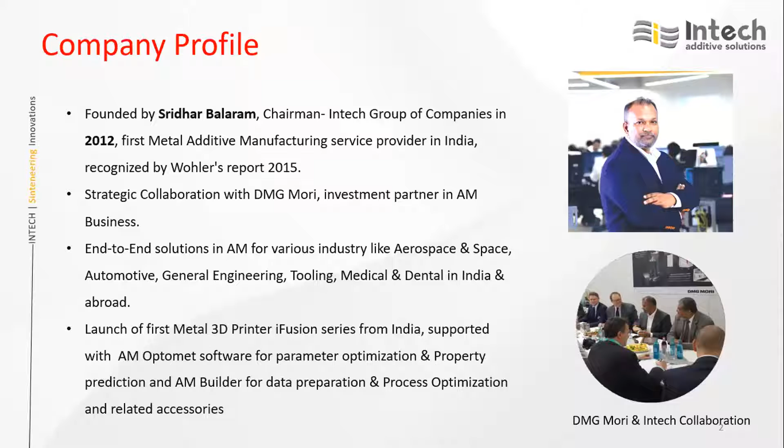We cater to various industries like aerospace, space, automotive, general engineering, tooling, medical and dental in India and abroad. We are the first metal 3D printer company launched in India, supported with AM Optomet software for parameter optimization and property prediction. We have also developed our in-house software called AM Builder, for data preparation and process optimization. All machine-related accessories are also developed by ourselves.

Coming to the Intech growth story, this company was founded in 2012 with 30 plus years of experience in foundry and machining. It started as the first AM service bureau in India. Later, we fully entered into providing services from 2014 to 2018, and we supplied many components to many government organizations as well.

In 2018, we launched our first product called AM Optomet, a parameter optimization software which helps in developing process parameters in a very quick time. Then in 2019, we launched the software called AM Builder, a data preparation software which helps in preparing data for 3D printing parts.

In 2020, we launched a machine called iFusion SF1. This is India's first laser powder bed fusion machine, launched and commercialized in India. Then in 2021, we successfully installed seven machines - 5 in India and 2 abroad, 1 in Germany and one in Greece.

Coming to the Intech product portfolio, we manufacture iFusion series machines. It is of 3 categories: small format machine, mid format, and large format.

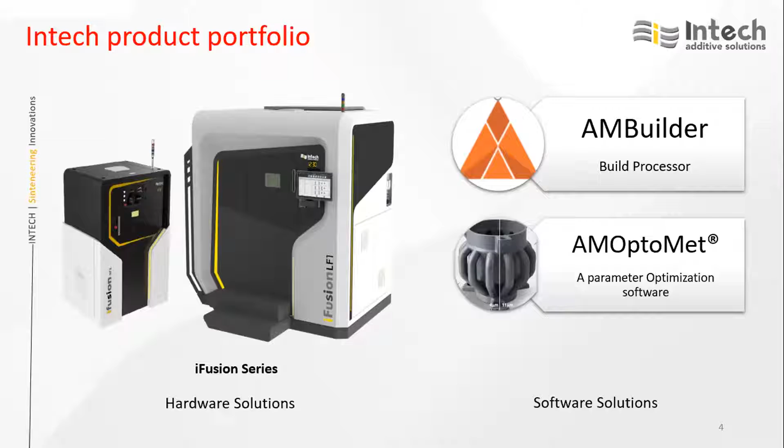Small format machines have a build volume of 150 mm diameter and 180 mm height. Mid format has the range of 325 mm cube, and large format has a build volume of 450 mm cube. These machines are supported by softwares called AM Builder and AM Optomet - AM Builder for data preparation and AM Optomet for parameter optimization, that is process optimization.

End-to-end solutions is something Intech provides to its customers and to people who want to start their business in additive manufacturing. The process starts with design and DFAM.

We have a strong design team internally which helps in converting conventional models to 3D printable models. In this process, first we take the CAD model from the conventional process, and we apply design guidelines - that is DFAM, design for additive manufacturing. By applying those guidelines to the conventional parts, we convert the part into a 3D printable part with improved performance.

In this process, we do topology optimization, generative design, part consolidation, and lattice structures to reduce the weight of the component and to save material.

Once the design part is finished, then the selection of material happens. In this process, as of now, there are very few materials available for metal additive manufacturing, so the selection of material is a very important criteria.

First, we analyze the material being used conventionally. Then, by taking the property values, we match the nearest material available for 3D printing. We also try to replicate the same material with the same properties, such as producing powder of the same chemical composition.

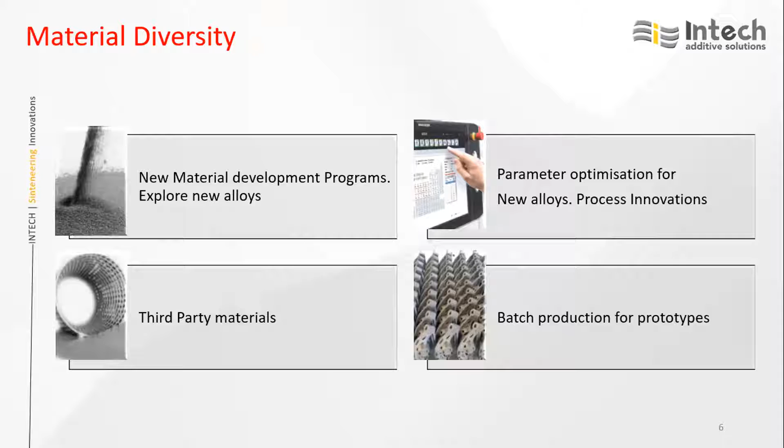Finally, batch production is something we are looking at, like printing multiple components in a single build to reduce the cost.

Coming to the technical discussion for today, I'm going to speak on introduction to additive manufacturing. I will not spend much time on this introduction, and quickly jump into the factors influencing the process and the procedure for developing the process parameters.

Introduction to additive manufacturing, then types of additive manufacturing. Specifically, I will speak on the laser powder bed fusion process, also called selective laser melting. Then AM process workflow, AM design rules and guidelines, factors influencing the AM process, strategies in laser powder bed fusion process, and material parameter development and qualification.

What is additive manufacturing? You may already know, but I'll explain in a few seconds. The official definition of additive manufacturing by ASTM is a process of joining materials to make objects from 3D model data, usually layer upon layer, as opposed to subtractive manufacturing methodologies.

What this means is, in a conventional manufacturing method, if you want to produce a component, we have to take a billet and apply turning, milling, drilling, and all these operations to get the final component. This is called subtractive manufacturing - we subtract material from the billet to get the final component. In this way, there is a lot of wastage of material.

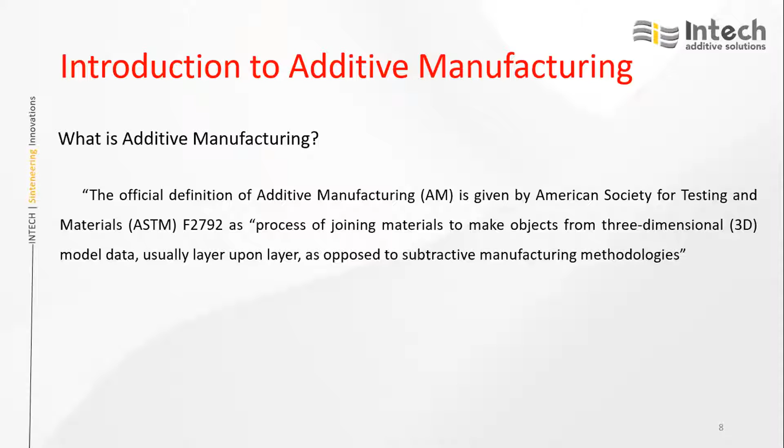Typically, AM processes are classified into 7 categories: material extrusion, vat polymerization, binder jetting, material jetting, sheet lamination, direct energy deposition, and powder bed fusion.

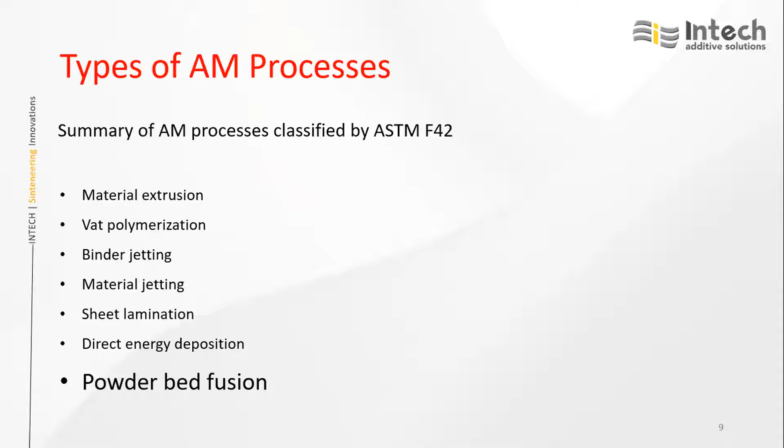Under powder bed fusion, there are again 2 processes: laser based and electron based. We are into laser based additive manufacturing. The principle of working of the laser powder bed fusion process is...

...the melting of the powder happens with the help of a laser beam. During the laser sintering process, a layer of metal powder is solidified by heating it to a temperature above the melting point through exposure to the laser beam, and subsequent solidification happens in an inert atmosphere. The atmosphere is very important in order to prevent the powder from oxidation.

Once one layer is completed, the build platform moves down by a thickness equivalent to the layer thickness, and with the help of a recoater, the powder for the next layer is spread onto the build platform. As per the CAD model, and with the help of a scanner and laser, selective sintering and solidification happens, and this process repeats layer on layer till the final layer is done and we get the solidified part out.

This is the typical schematic of the laser powder fusion process. Here you can see the left side is for powder supply - it's a two-way powder supply, from left to right and right to left. Between it is a build platform where you can see the printing of the component happening with the help of a laser, focusing lens, and moving mirrors called scanner mirrors.

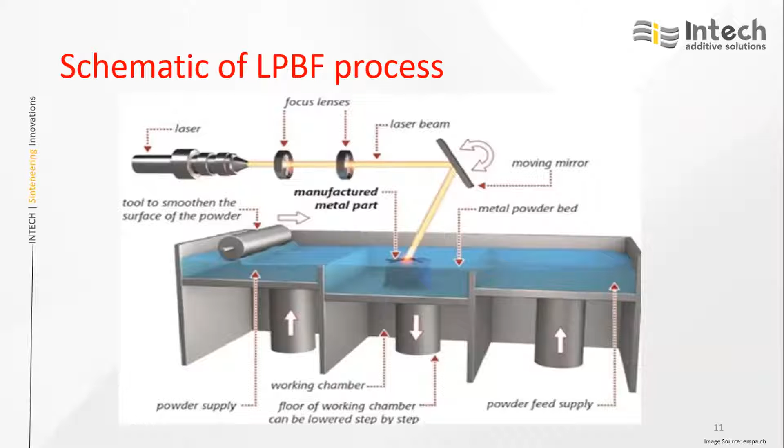To print the actual component, we need a supporting plate at the bottom, called the base plate. The actual part printing happens on top of it. The size of the base plate varies from machine to machine.

Then printing happens. Once printing is done, we need to separate the printed components from the base plate, called wire cutting. We cut with the help of wire EDM to separate the components from the base plate. The base plate's leftover regions will be machined and the base plate will be reused.

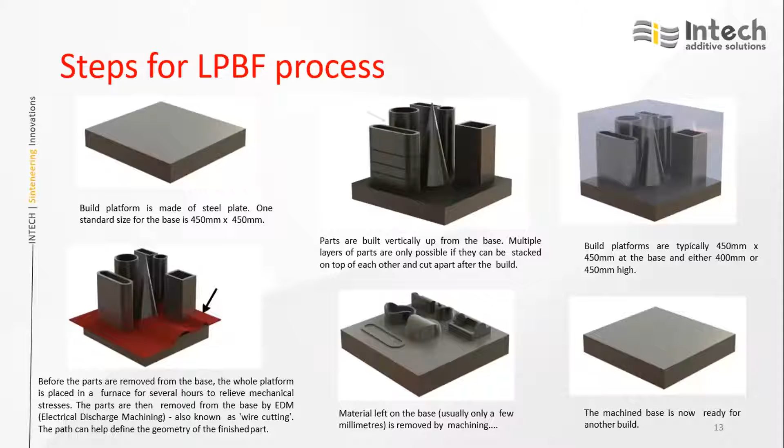Since we are cutting it, we can't directly cut the actual component, so some clearance needs to be provided from the base plate to the start of the actual component. That is called wire cutting clearance, normally 1 to 2 mm for any component that needs to be printed.

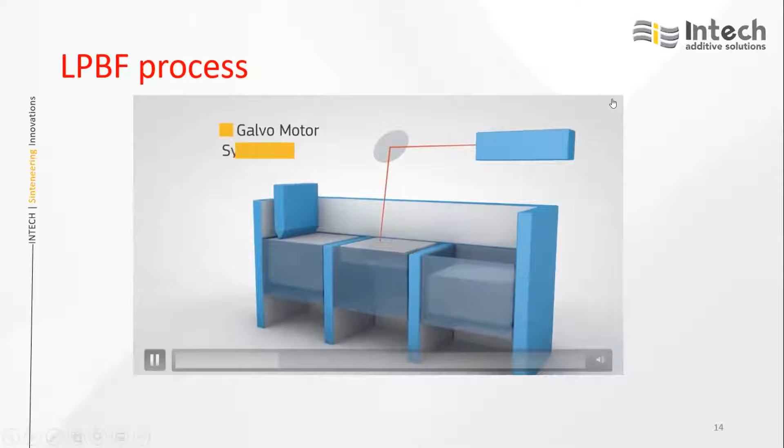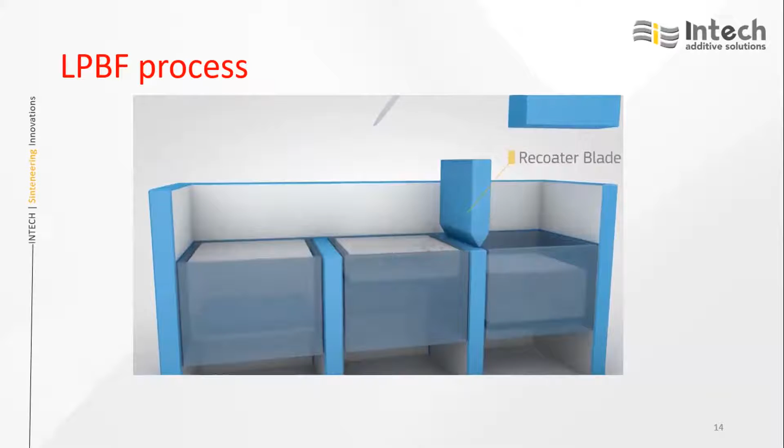I'll play a video on how the laser powder bed fusion process looks. This is how the process prints.

Coming to the process flow, it has 3 phases: design, manufacturing, testing and qualification. In the design stage, first the specifications required for designing a component are taken, and with the help of CAD software, it is designed as per the specifications.

The input for data preparation in additive manufacturing is the STL file format. The CAD model is converted into STL format, and the STL file is inputted to the data preparation software, which we are using, AM Builder. We import the part and do all the orientation and support optimization in this builder software.

Once that is done, slicing happens, since it's a layer-on-layer process. We need to slice the component into a number of layers, and this data is called an INSL file, which is transferred to the machine. As per the data provided in the INSL, the building of the parts happens.

Once printing is done, it is removed from the machine, called part removal. Once the part is removed, we need to perform post processing. Once post processing is done, the final step is part inspection. If the specifications are within limit, the part will be accepted. If it is out of the specification limit, we reject it and go back to the machine setup to check the problem, whether it's due to process parameters or other process-related issues, and we need to address that.

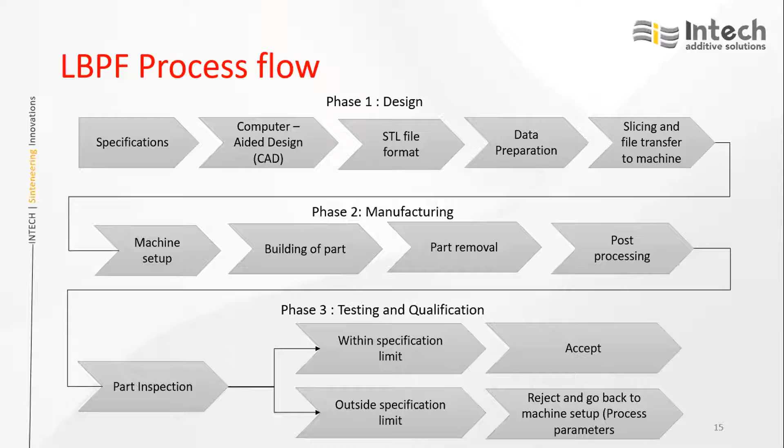Coming to the data preparation workflow: first we create the build of certain dimensions of the machine, then import the parts. If there are any errors in the STL, we need to fix them.

There are certain limitations in additive manufacturing called thickness, specifically minimum thickness, which is only possible in the process. For that, we need to check wall thickness analysis.

Once all things are satisfied, we need to position the component on the build platform, called orientation. Which orientation will give less support? Since supports in this process are costly, we need to orient in such a way that the support structures are less and the build time is less, in order to improve productivity.

Once that is done, we need to do distortion analysis for the support given, to check whether the part is printable or not. If less support is given, there's a chance distortion will happen, because this is a process where melting occurs, so thermal stresses will be induced in the component, causing a chance of distortion. So this distortion analysis needs to be performed.

Once that is done, we need to slice the component and export the data to the machine.

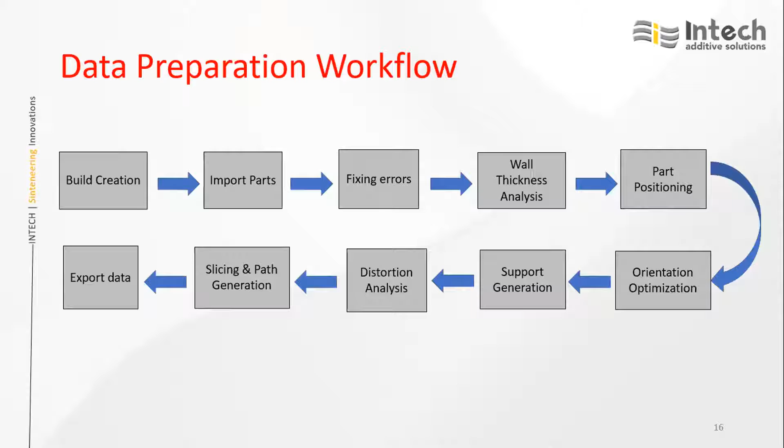I will play one more video on the process of laser powder bed fusion.

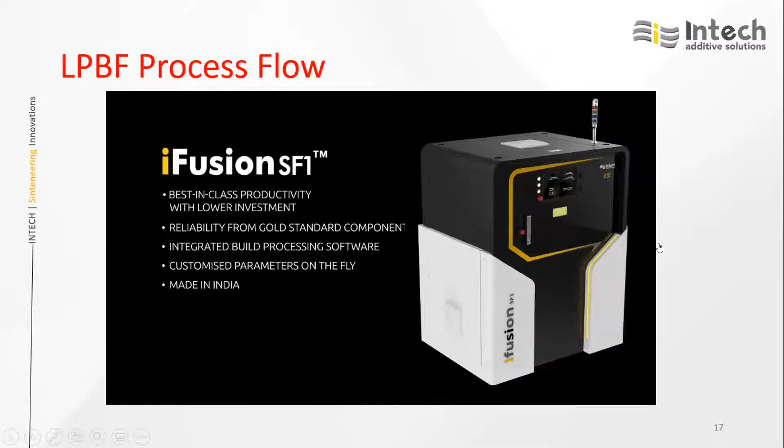This is our Intech SF1 machine, iFusion SF1. It has a dimension of 150 mm diameter and 180 mm height.

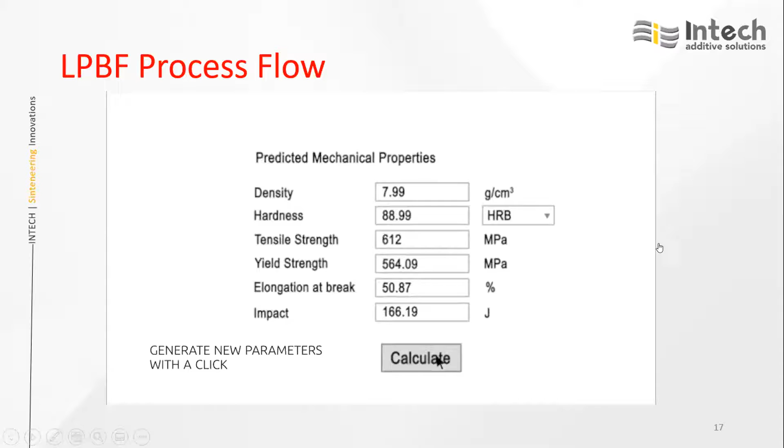This is AMOptoMet software for parameter optimization. Initially, we can select the chemistry of the material and give the percentages to it. If you click on the calculate button and adjust it, we will get the process parameters directly. We don't need to go through DOE, design of experiments. We can directly get the process parameters.

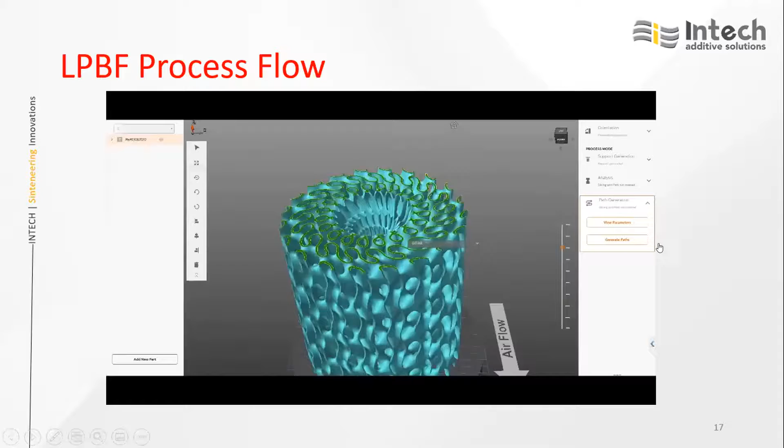With the help of AM Builder software, we can create the build size as per the machine and import the component and apply the hatching parameters. This is the path generation. You can see the vectors for the laser movement. Once that is done, the file is exported into the machine.

With the help of the recoater, we are spreading the powder, and as per the sliced layer, we will be printing, and this process repeats till the final component is done.

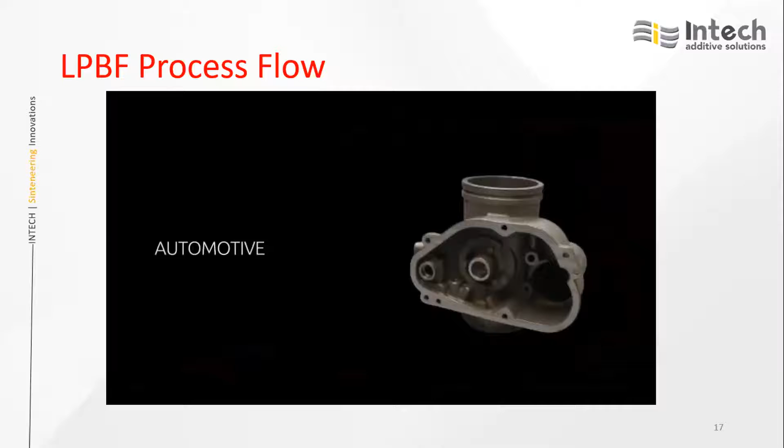Why laser powder bed fusion process? I'll give a small comparison among different processes to produce a net shape machine part, assuming it is having a weight of 61 grams.

These are a few components which we have printed using laser powder bed fusion process. One is the flame tube. It has a dimension of 600 mm and 300 mm height. It is sectioned into five segments and printed, and finally laser welded.

And the second thing is IN718 turbine blades, which has a diameter of 100 mm and 60 mm height, and finally heat treated as per AMS 5662 to get the required part properties.

And this is the impeller, on the right hand side, which is made of 17-4 PH material. It has a diameter of 280 mm and 50 mm height. Machined and heat treated as per H900 cycle. In 3D printing, we will not get the machined surface which is seen in the image, so it has to be machined or post-processed based on the surface roughness required.

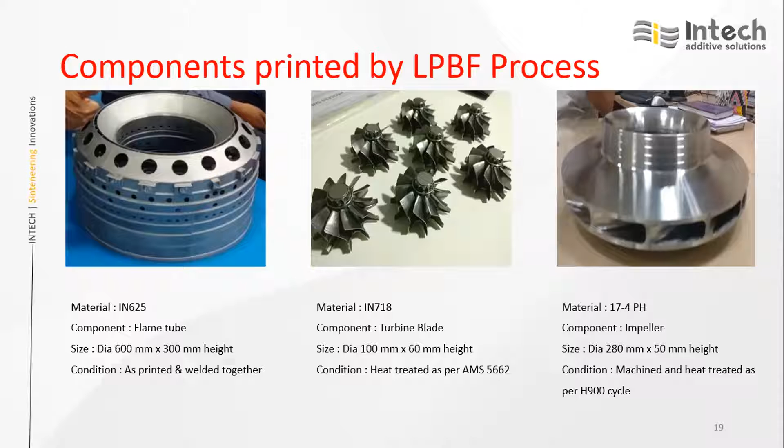Now I'll speak on factors influencing the laser powder bed fusion process. Majorly, the process is influenced by these categories: material, equipment, and production process, post-processing, inspection of the component, and material qualification.

When it comes to material, in this process, the input material is powder. So at the powder stage, all these major elements like chemical composition, tap density, morphology, flowability, particle size distribution, and the number of times the powder has been used.

All these details you need to take, analyze, and once it is okay, then we need to go to the equipment level. There we need to check the calibration of the equipment, standard operating procedures of the machine, and preventive maintenance checklist. All this we need to check.

Once the equipment level is passed, then we need to go for production. If DFAM needs to be performed on the component, it needs to be performed. Inert gas flow - in this process having inert atmosphere is very important. That condition we need to check.

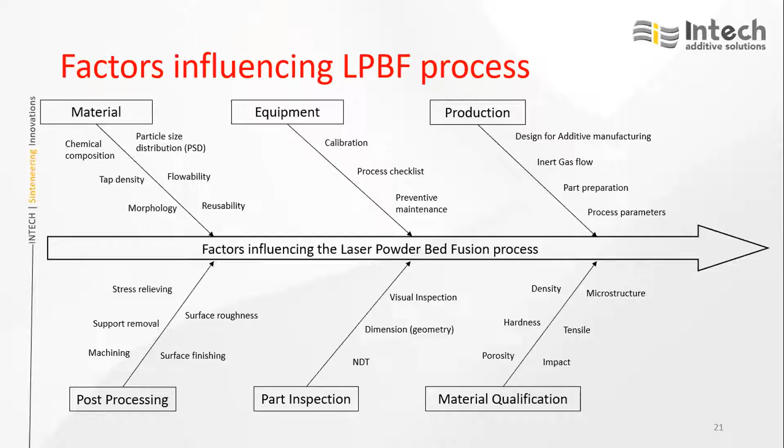The reasons behind the delamination and the major problems which we get in the process are delamination of the layers, shrinkage, cracks in the part, distortion, and warpage during post processing. The reason behind this is maybe the process parameters, maybe a bad machine preparation, and maybe the selection of base plate is not suitable for the given material.

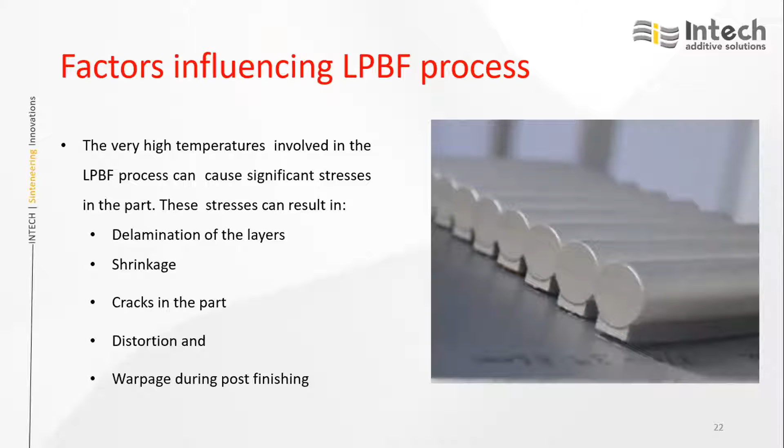There are many factors involved why the part fails. How to avoid that? These problems can be minimized or avoided by roughening the parts to relieve stresses.

If a base plate surface is too smooth, then the weldability will be weak. So having a little rough surface on the base plate will always help for proper bonding of the first layer with the base plate. If the first layer with the base plate is proper, then there will be proper heat transfer and dissipation from the printed layer to the base plate. So a kind of shot peening or roughing is required.

Then heat treatment is done to relieve the stresses before we actually break the supports. Supports are supporting structures. If that is done without relieving the stresses, once the supports are removed, there will be a chance of distortion in the component. This needs to be minimized or eliminated. To eliminate that, we need to relieve the stresses.

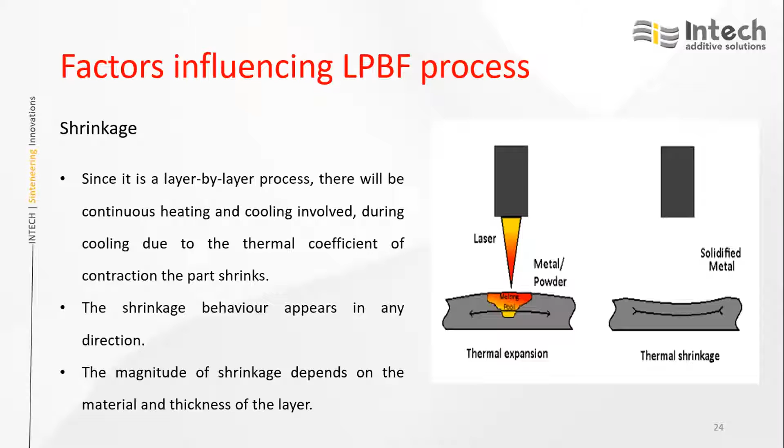So these shrinkage allowances we need to compensate in order to get dimensional accuracy. To get that, we need to perform fine tuning, like how much shrinkage will be there for each material in x direction, y direction, and laser beam offsetting. All this we need to perform. We will have a standard component for that, print on it, get the differences, and by having the differences, we will apply the correcting factors.

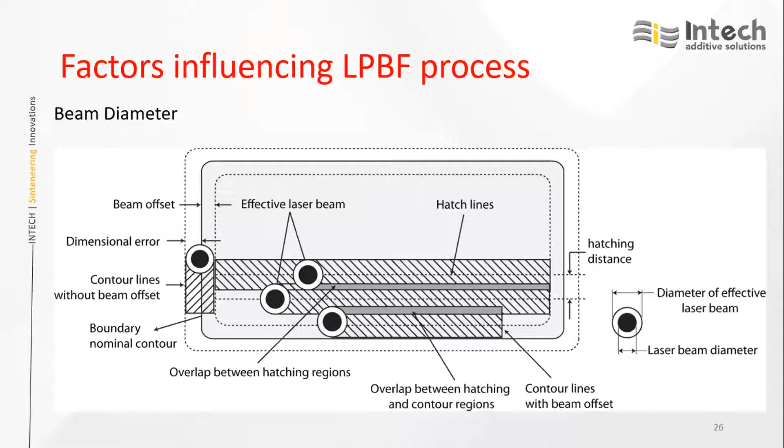In order to reduce this, we need to shift the laser inside the actual component by a distance equivalent to half the diameter of the effective laser beam. That is our experiment. With this experiment, we will get that beam offset value as well.

And support structures: if support structures are too strong, there is a difficulty in removing the supports. Supports need to be removed easily, and should not be too weak such that during printing only we get a problem with delamination. So a sufficient amount of supports and parameters needs to be selected such that it has sufficient strength to also support the actual component. This will help in reducing the thermal distortion that leads to cracking, curling, delamination, and shrinkage.

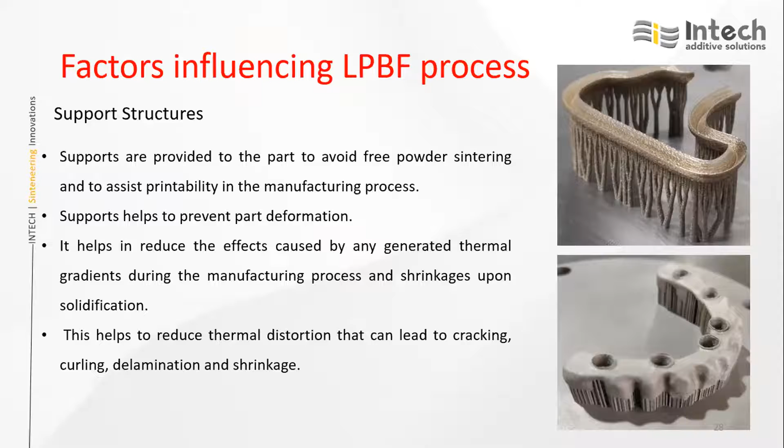One more important factor influencing the process is inert gas flow. Because in this process we are melting the component, and the heat reaches boiling point, and then vapors will generate in the process. During the laser beam interaction with the powder, there is a chance that a few particles from the molten pool will get spattered from the pool.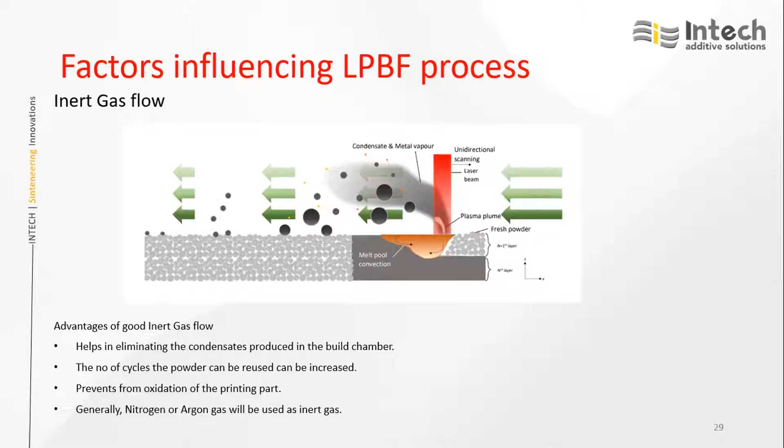All this in the form of condensate, if it falls back on the powder, which you can see as black particles falling back onto the powder bed - if this is not removed properly, the powder will get contaminated, and the life period of the powder will get reduced. If it is properly removed with the help of inert gas, then the quality of the powder will be maintained for a long time, and it can be used for many builds. Typically, nitrogen or argon gas will be used as inert gas.

Conditions at which the operation is happening are also very important, because the laser and scanner mirrors will always be maintained at a certain temperature. Small deviation will affect the part geometries and cause problems. So the typical temperature which needs to be maintained is 18 to 22 degrees and relative humidity of 40 to 60%.

The most important thing is powder quality. If the input material has problems, obviously the final component will have problems. So powder quality needs to be evaluated thoroughly. We need to check morphology, composition, and physical behavior. Under morphology: size and shape. Size is the particle size distribution, and shape is whether it is spherical, satellite-like, or irregular. All these we need to evaluate.

Coming to composition, chemical composition, like each element is within the normal composition or not. Then microstructurally, phase and porosity. If porosity is there in the input powder itself, then there is a high chance of getting porosity in the final component. Then physical behavior, flowability.

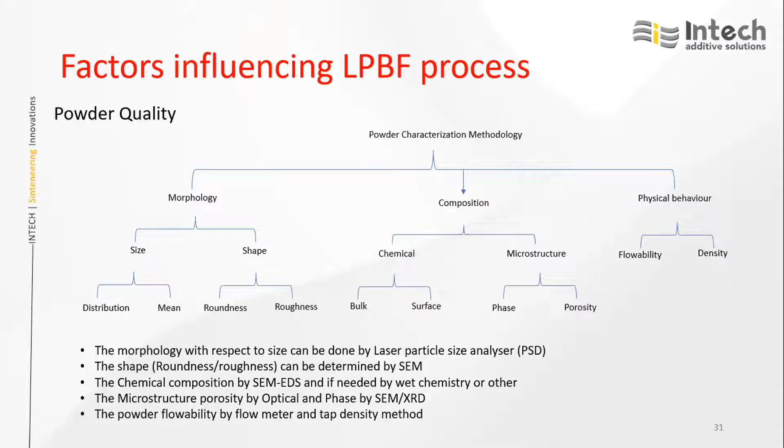The powder needs to be stored in good, tight, air-free containers, because if it is open to the atmosphere, there is a chance the powder catches the moisture present in the air. So it needs to be packed properly and kept in a shelf so that the life of the powder usage can be increased.

Before I start the procedure and explain why process parameters are important, I will show the defects and the reasons behind the defects in the laser powder bed fusion process. But before that, I would like to take 2 to 3 minutes for questions and answers.

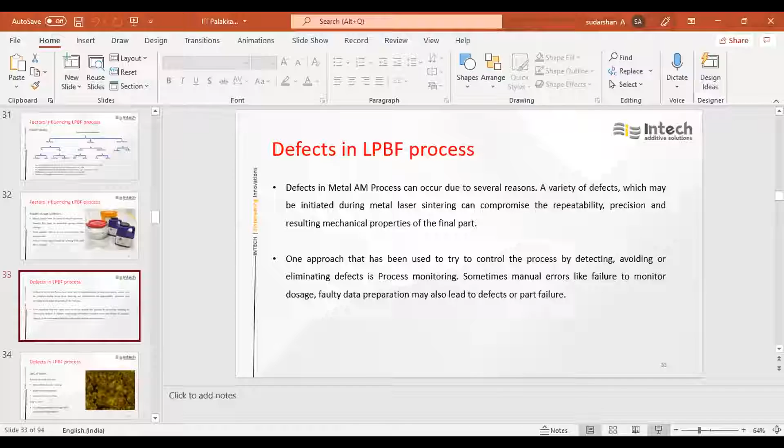Sir, you talked about some support structures. Yes, support structures. So after doing the process, what is the solution to remove these support structures? What solution is utilized?

This is metal based, so here we will not use any solution. It is done manually, we need to use tools, pliers, and so on to remove it. If the support structure is too strong, then we need to do machining. Those things I will cover in the post-process section, it is yet to come. I will show how it is manually removed and how the machining happens. Okay, thank you sir.

Any other questions from the audience? Sir, what is the minimum dimension that we can print with the equipment?

We also need to consider the aspect ratio. Considering all that, a minimum wall thickness of 0.3 mm is possible, sir. 0.2 mm is also possible, but not for bigger heights like 30, 40, 50 mm. If the height is up to 10 mm only, 0.2 mm is also possible. But it is recommended to have 0.4 mm wall thickness all the time. Minimum 0.4 mm, less than that is also possible but depends on the aspect ratio, like how much height we need to print with that particular thickness. With 0.4 mm, it is possible to print whatever is required. So 400 microns is the minimum.

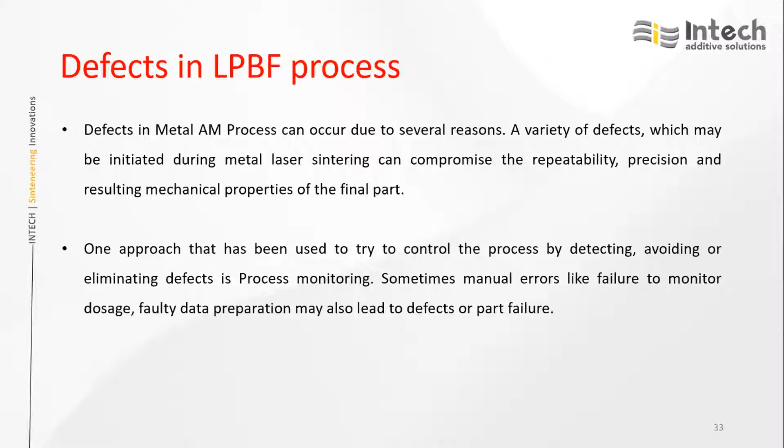The reasons for lack of fusion may be non-uniform powder coating, bad process parameters, or improper inert gas flow. How to solve this? We need to optimize the process parameters very well, in such a way that sufficient energy is provided to melt and solidify the powder.

The second thing is porosity. Porosity's reasons behind it are also bad process parameters and improper inert gas flow. Bad process parameters is a direct thing. Improper inert gas flow, as I mentioned, the condensate which is generating, if it falls back onto the powder bed, it will disturb the laser beam.

When the laser beam interacts with the powder, if this condensate is there, the penetration of the laser beam to the required depth will not happen. Because of this, porosity may come. So again, by optimizing the process parameters and controlling the inert gas flow, the porosity can be controlled.

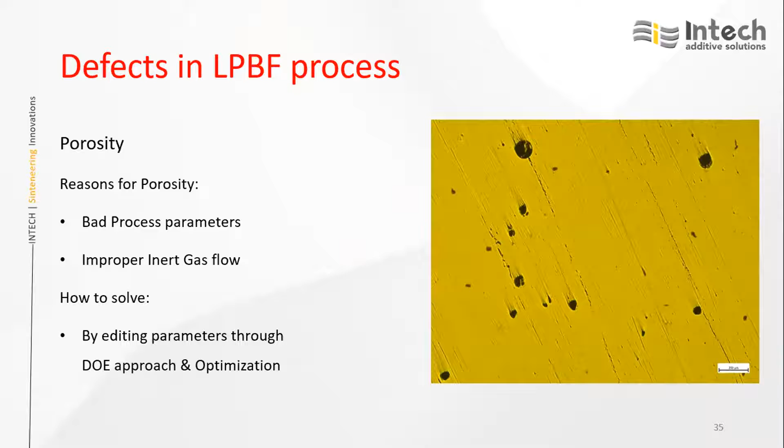And ball formation, this will happen when high energy density, high energy of the laser is used. This again can be solved by optimizing the process parameters.

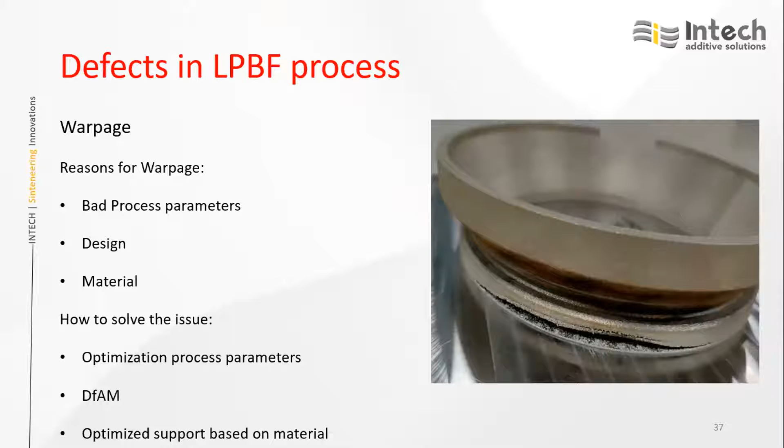And warpage, this is the lift off on the base plate. This also happens because of bad process parameters, design, and the material. How to solve the issue? Again we have to optimize the process parameters. We have to do DFAM, design for additive manufacturing, optimize it, and select supports based on material.

This is support failure. The support got delaminated from the surface. This is because of bad support parameters and support selection. So we need to optimize the support parameters as well while optimizing the other parameters, with right selection of supports for the given location, based on the location and the amount of component area that needs to be printed on the support.

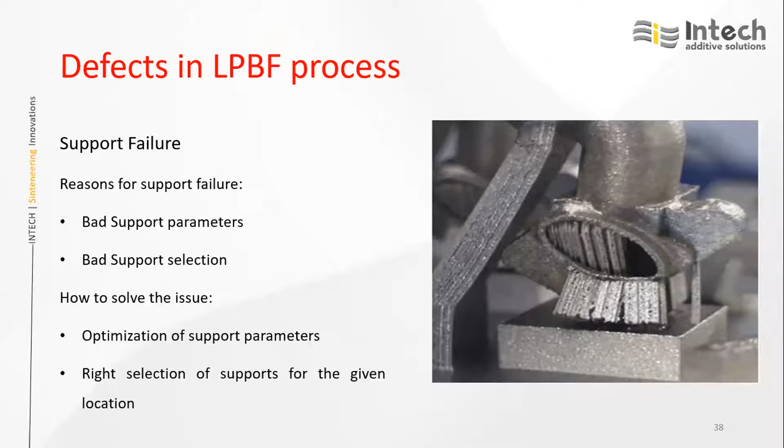I will show the different categories of process parameters that are important for building the component in the later slides.

How to solve the issue is providing the supports wherever required and the parameter optimization.

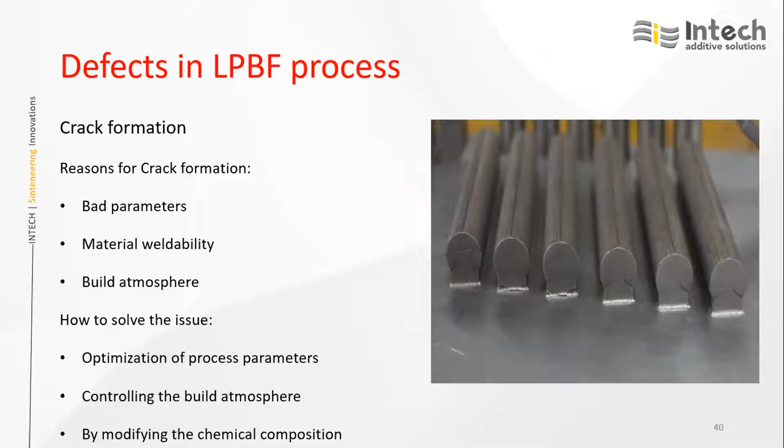How to solve the issue is we need to optimize the process parameters, controlling the build atmosphere. And if the material itself is prone to cracking, then we may need to modify the chemical composition without affecting the final properties.

What are the important process parameters that need to be optimized? One is laser power, scan speed, hatch spacing, and layer thickness. Laser power is the amount of heat generated by the laser in joules per second. Scan speed is the speed at which we are making the laser beam move on the powder bed. Hatch spacing is the distance between two consecutive laser beam paths in a given layer to cover the entire area.

The laser has to go in vector forms. In the video, we have seen vectors are there. For each vector, the distance between two vectors is nothing but hatch spacing. Layer thickness is the thickness of each layer.

Here I will be showing what is hatch spacing. Hatch lines you can see, and hatch distance is between two scan paths - that is called hatch distance. Laser and the spot with what speed it is going is the scan speed, and the power is the amount of heat we are inputting. Layer thickness is also the thickness of the layer.

Here you can see contour lines without beam offset on the left side. If the diameter is exactly sitting on the border of the component, half of the portion comes outside it. That is called dimensional error. As I mentioned, we need to put that diameter inside so that we compensate the dimensional error.

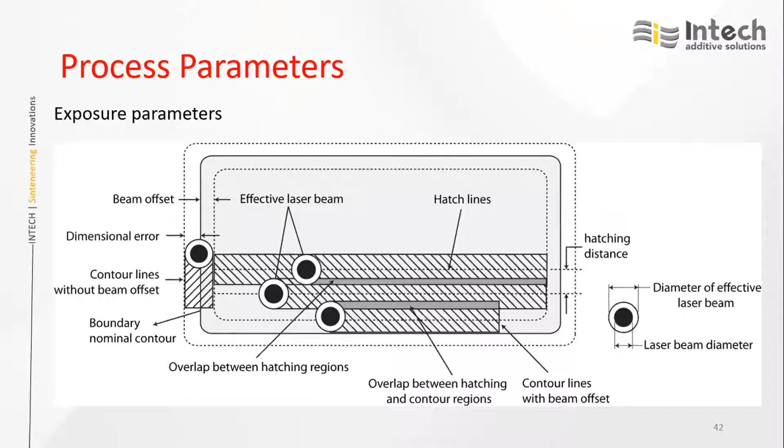How to decide these four process parameters? This is depending on energy density. Energy density is in terms of joule per mm cube. It is the amount of energy required to melt a material of 1 mm cube - like to melt a 1 mm cube block, how much energy we need to supply. That calculation, I will give some guidelines how to arrive at the energy density.

Once we arrive at the energy density, we have to split that energy density into process parameters. What is that process parameters - laser power, scan speed, hatch spacing, and layer thickness. Energy density is nothing but laser power divided by scan speed into hatch spacing into layer thickness.

How to arrive at the energy density? For a given material, the amount of energy required for melting 1 mm cube area is to be calculated. This energy density varies from material to material because the material properties are completely different. If it is aluminum, the melting point is very less. If it is steel, it is more. If it is refractory metals, it is still more. So obviously the amount of energy required to melt 1 mm³ area is different.

So first, for a given material, we need to collect all the material properties like density of the material, thermal conductivity, latent heat, melting point. All those we need to collect, and using some formulas, we need to calculate what is the amount of energy required to melt that.

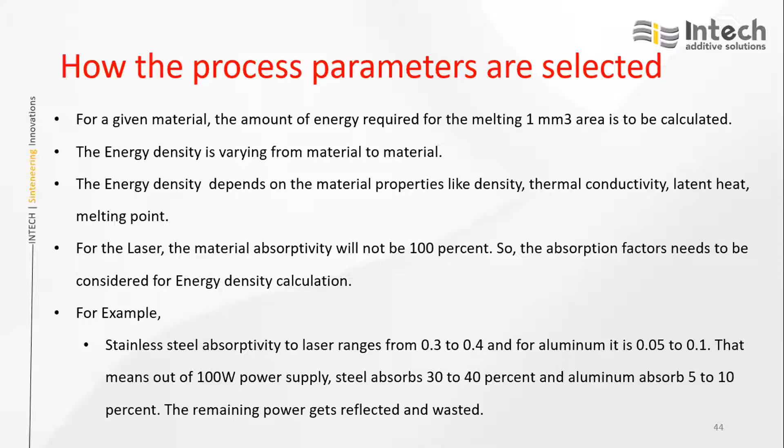For a given component, there will be exposure areas like core of the component, upskin, downskin, contour, and support. The key process parameters are only 4: power, speed, hatch spacing, and layer thickness.

When a given component is given, it has 5 zones: core of the component, which is inside the component; upskin, which you can see when it is split into layers; the bottom layer is downskin, since nothing is there underneath; on top of that core is printed, and on the right side upskin is there.

It is a comparison between two layers, core and core, bottom core and top core. Whatever area is not replicating in the present layer compared to the previous one is called upskin. And if you see the third core area on the left hand side, it is an overhang compared to the previous layer. No material is there in the layer below, that is called downskin.

So downskin parameters are different, upskin parameters are different, core parameters are different, and support parameters are different. And to get the roughness right, border printing is there, called contour printing, and those parameters are different too.

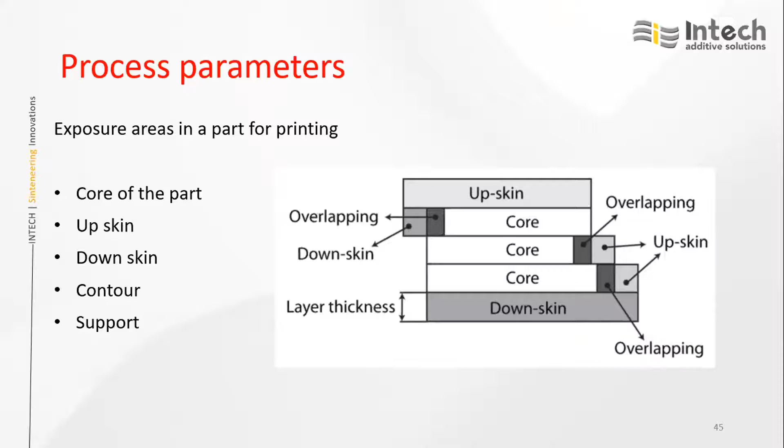And if you go specifically, core again has parameters like scan, stripe width, stripe overlap, minimum vector length, merge vector length. These are all required to get a dimensionally good and defect free part.

But basically these 4 parameters are very important. All others are also important, but if these 4 parameters are optimized properly, we'll get good density. All other things are easy to optimize.

In a similar way, downskin has many process parameters, upskin has many. Contour and support will have all these parameters too. When you want to produce a component that is good and defect free, this number of process parameters needs to be optimized. It's almost 100 to 150 process parameters we need to optimize.

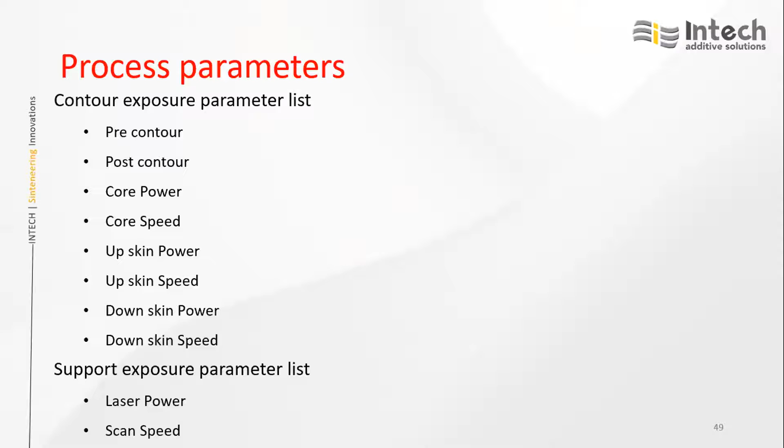Out of all these, the 4 parameters - power, speed, hatch spacing, and layer thickness - are very important. It's about how we need to arrive at energy density and how the process parameters need to be optimized.

Then comes post processing. Why is post processing required? This is to remove the printed component from the base plate, remove the powder from the printed component, improve the surface roughness, improve the mechanical properties, reduce the residual stresses, and achieve the dimensional accuracy.

Here you can see how the printed component is removed. Once the component is printed on the base plate, it needs to be removed from the machine, and the methods of removing it are manual or automatic.

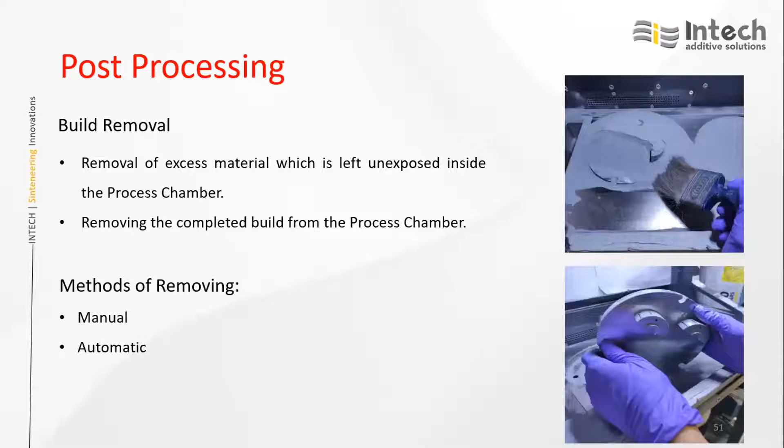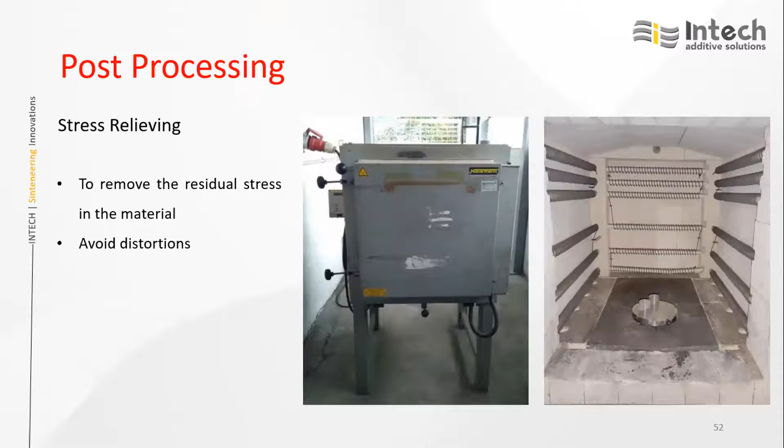Then we need to do stress relieving. Once the part is printed, in order to relieve the stresses, we need to put it into the furnace, and based on the material, we select the heat treatment cycle to relieve the stresses.

And once that is done, we need to remove that component from the base plate with the help of wire cutting. Support removal - one of you has asked how supports are removed.

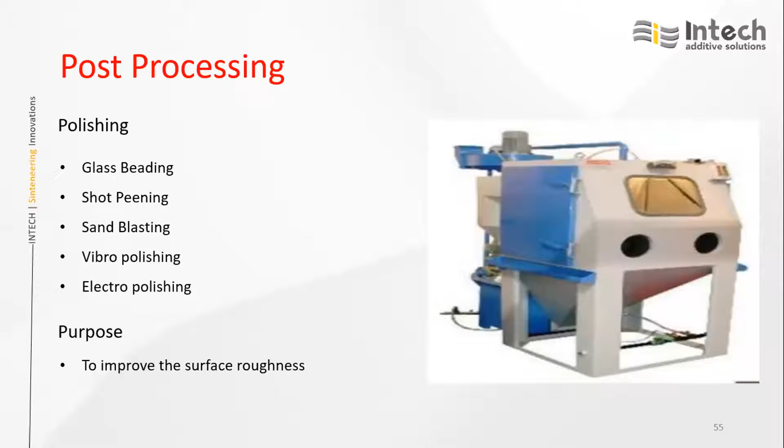And to get a good surface finish, we can go for glass bead blasting, shot peening, sandblasting, vibro polishing, and electro polishing. These are all operations based on the surface roughness requirement. We can go through any of these polishing techniques.

This is the final heat treatment. Earlier was the stress relieving. This is the final heat treatment to get the required mechanical properties.

For this, solutionizing and age hardening is something which we normally follow. During the solutionizing stage, we can get a homogeneous microstructure. Then by doing age hardening, also called precipitation hardening, we can improve the mechanical properties.

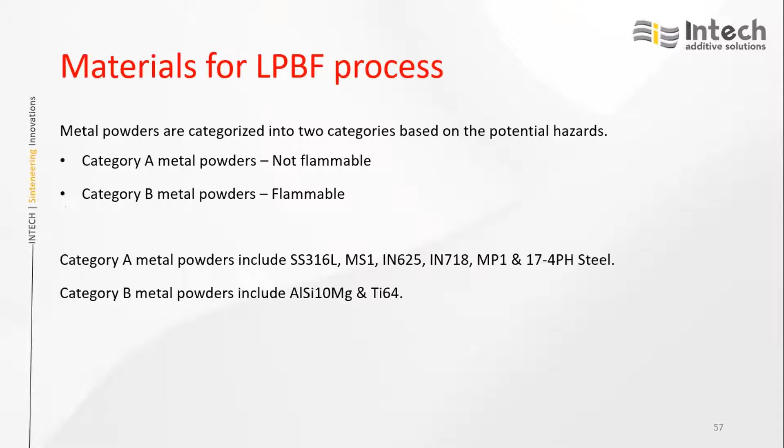Materials for the laser powder bed fusion process are categorized into 2 things: non-flammable and flammable. Category A metal powders include SS, maraging steel, 625, 718, cobalt chrome, and 17-4 PH. Category B metal powders are AlSi10Mg and Ti6Al4V.

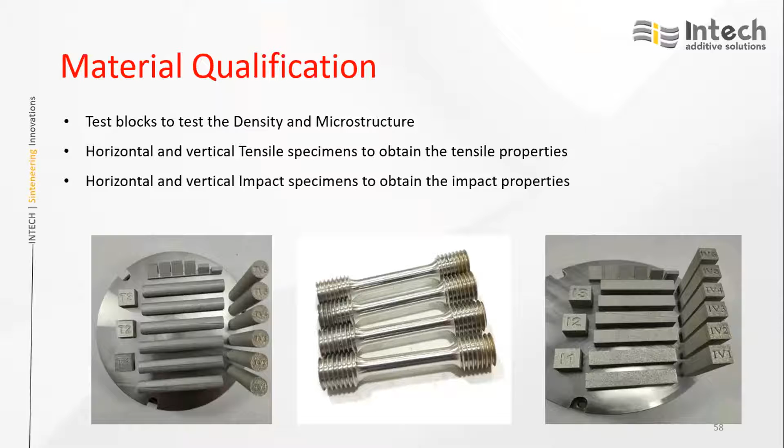These impact and tensile bars are in terms of cylinders or cuboid structures. This needs to be machined as per standards like ASTM E8 for tensile and E23 for impact. To these dimensions we need to machine, test, and qualify it.

Basically, material qualification has to go through these 5 stages: one is at the powder stage as the initial thing, then part printing, post processing, material characterization, and mechanical testing.

For powder, I have explained what and all we need to check: PSD, morphology, chemistry. For printing, data preparation, slicing, and process parameters.

Post processing includes stress relieving like supports removal, final heat treatment, solutionizing, age hardening, hipping, grinding, vibro polishing, all those. Material characterization includes density, hardness, sample preparation for porosity and microstructural characterization.

Then finally mechanical testing. From powder to end part for application, all those testings we need to perform.

This is a simple case study to better understand why additive manufacturing. Historically in aerospace, buy to fly ratios can range from 15 to 30 to 1 on the high end, depending on the shape of the part and the manufacturing process. With the implementation of additive manufacturing, the wastage can be significantly reduced while also being cost competitive.

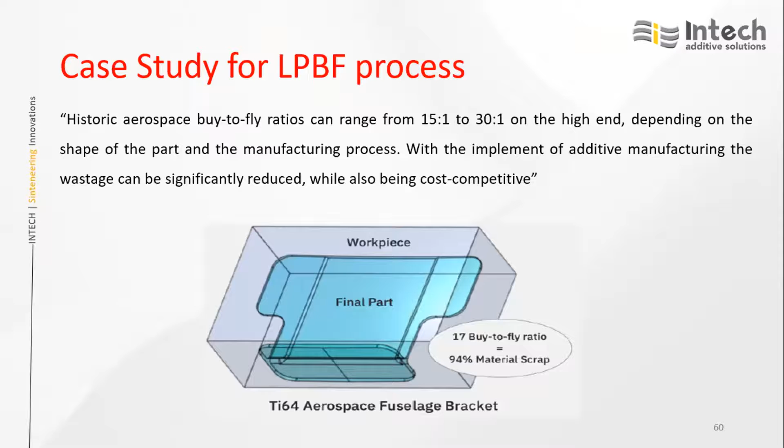The different colored thing inside is the actual component. To produce that, we need to take a workpiece of bigger size and machine it. In this process, to get 1 kg of final component, we may need to use 15 kgs to 30 kgs of actual raw material. So almost 80 to 90% of material is getting wasted. This can be controlled using additive manufacturing.

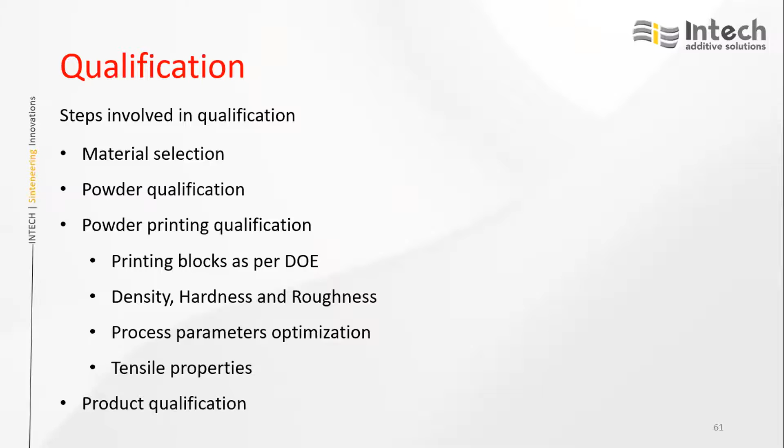Finally, on the product also, we perform radiography to check if any porosity is captured in the welded zone. If porosity is found in the welded zone, we have to perform the welding one more time - that we have done as well. Typical powder manufacturing processes include water atomized, gas atomized, plasma rotating, and centrifugal.

Typically, gas atomized powders are widely used in this process. Why? I will explain now. Water atomized powders have a particle size range of 0 to 500 microns.

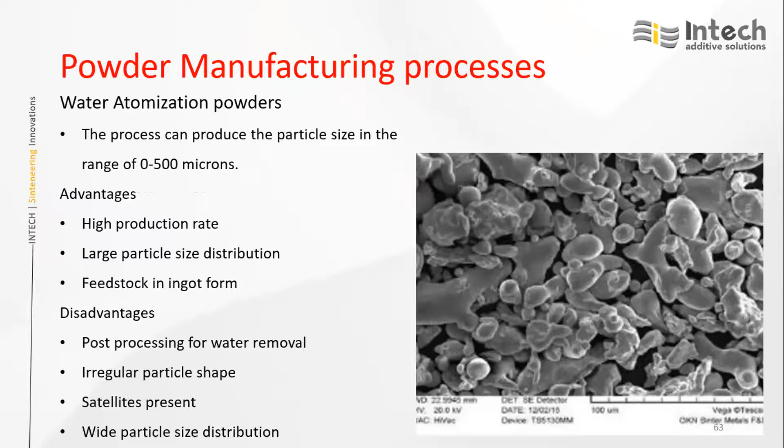Advantages are high production rate, large batch, feedstock is in ingot form. Disadvantages: since it is water atomized, water is used for jetting purpose, so removing water from the powder is a challenge. Irregular particle shape, satellites are present, and wide particle size distribution.

With water atomization, you can see how the shape of the powder looks here, very irregular. Actually, with gas atomization, sphericity is increased to a bigger extent. Here also we can produce a particle size range of 0 to 500 microns. A wide range of alloys can be produced in this process, and feedstock is in ingot form.

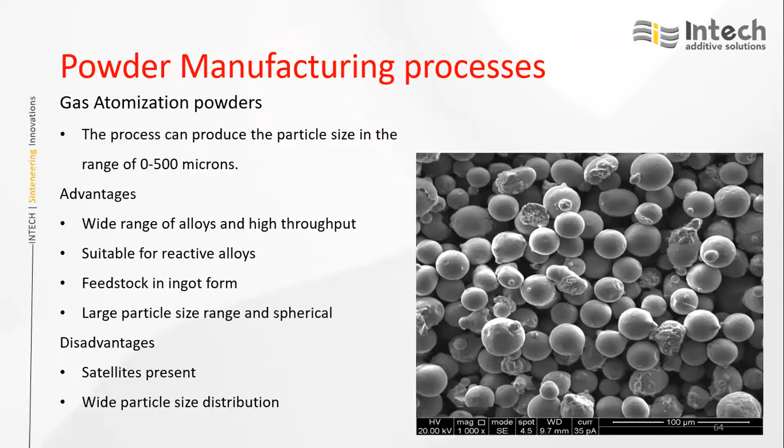Disadvantage is that in this process also there is a chance of a few irregular particles being produced, along with wider particle size distribution. When it comes to plasma atomized powders, the sphericity and quality of the powder is still improved compared to the gas atomization process, but the cost goes higher.

Plasma rotating electrode process: in this process, you can see how good the powders look. There is more sphericity, the flowability is very good, and it produces high purity powders, but with low productivity.

When producing gas atomized or water atomized powders, the throughput is very high. Here, it is very low, so obviously the cost per kg will go high.

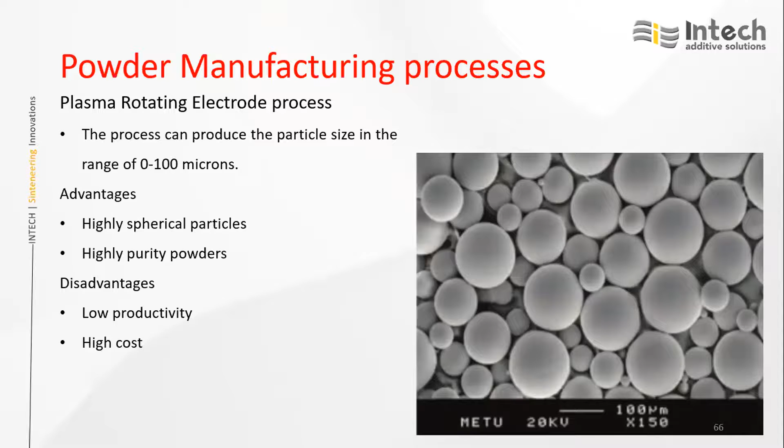With centrifugal atomization also, it is the same case. As we go for good quality improvement, then obviously the cost of the powder will go high.

In order to balance all this, we select gas atomized powders. The sphericity is okay and the cost is also okay. Compared to water atomized powders, the cost is on the higher side, but when it comes to sphericity and suitability, it is preferred to have gas atomized powders.

Water atomized powders can also be used in areas where mechanical properties are not that important. If you take automotive or any stationary component in the automotive sector, the shape is very important, not the strength of the material. In those cases, we can use water atomized powders. That is called general engineering applications.

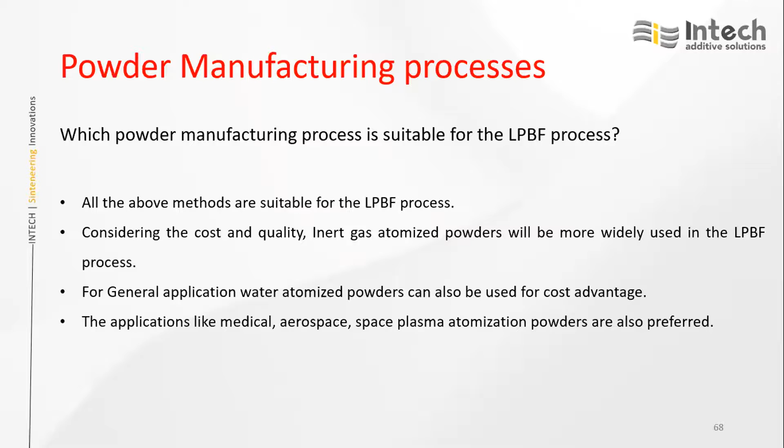When we go to areas where money is not the concern, such as space, medical, and aerospace, quality is important there, so we can go for plasma atomization powders. The selection of powders purely depends on the kind of application.

Typically, powder characteristics should be in the range of 15 to 45 microns, or 15 to 53 microns. That means, if you elaborate, D10, D50, D90. D10 means 10% of the particles should have a size of 15 microns plus or minus 3 microns.

D50 means 50% of the particles in a given powder should have a particle size of 30 plus or minus 3 microns. D90 means 90% of the particles have that size threshold.

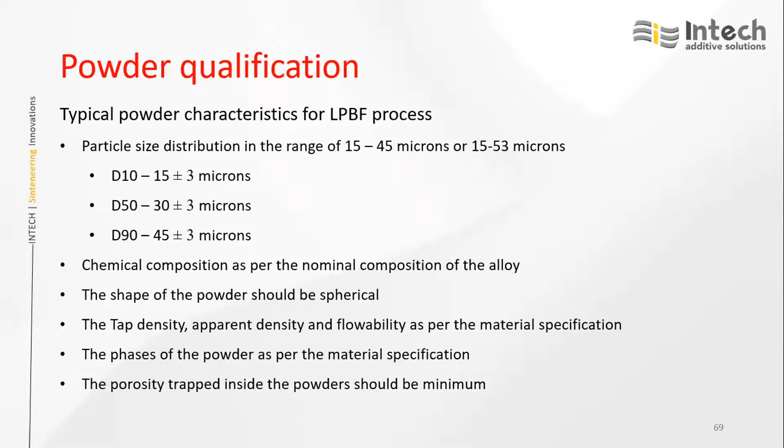Then we need to check the chemical composition as per the standard chemical composition. The shape of the powder should be spherical. We check tap density, apparent density, and flowability in order to freely spread the powder on the powder bed, and the phases of the powder as per the material specification. If steel has an austenitic phase, or 17-4 PH has different phases, we need to check whether the raw material has phases similar to the actual metal. Also, the porosity trapped inside the powder should be minimum.

Methods to measure particle size distribution include sieve analysis as per ASTM B214, one methodology used for measuring PSD, or laser light diffraction as per ASTM. This is the testing process, similar to tensile testing ASTM standards. For measuring PSD, there are specific ASTM standards, and this is common across the processes. Whatever process we follow, we need to do testing as per the standards to get the result.

When it comes to morphology, there are many methods to assess it. We were using SEM analysis, and the minimum limit is that if the sphericity is above 0.85, then it is good enough to use in the process.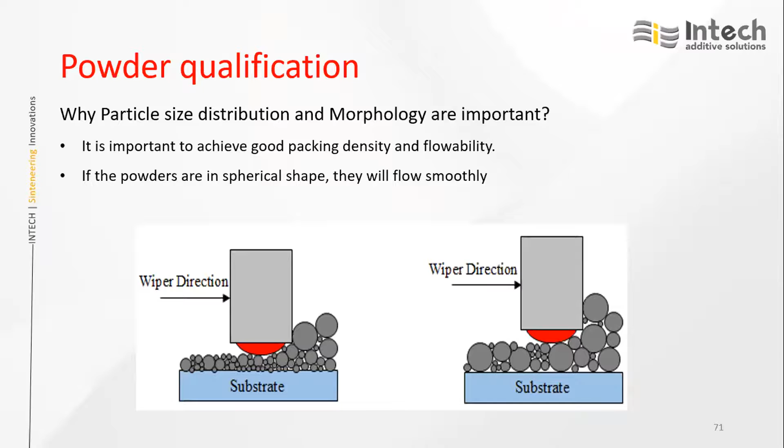Why PSD and morphology are very important: you can see when the powder is spread onto the plate, if a wider distribution is present, the packing is good, and there are no pores, as seen in the left side image. On the right side image, you can see bigger particles with very few smaller particles, leaving gaps in between. If these gaps are there, after printing those gaps will appear in the printed component, causing the powder density to come down. So powder selection is also very important.

Chemical composition can be checked using ASTM E353 and ASTM E1019. And for density measurements also we have standards.

Another characterization, if any material in-depth characterization is required after heat treatment, we can perform X-ray diffraction technique and any EBSD kind of analysis on the components.

The printing of coupons by DOE approach, how the process we need to do to optimize the process parameters.

Initially, a set of DOE we need to take. Here we have taken 16 test blocks with 16 different process parameters, like energy density and laser absorption factors. We can't hit bullseye on the exact value we need to consider. Nobody can get it exactly. We will get a range, like energy density 50 to 70 is something which is the range we will get. Within that range, we need to formulate the DOE.

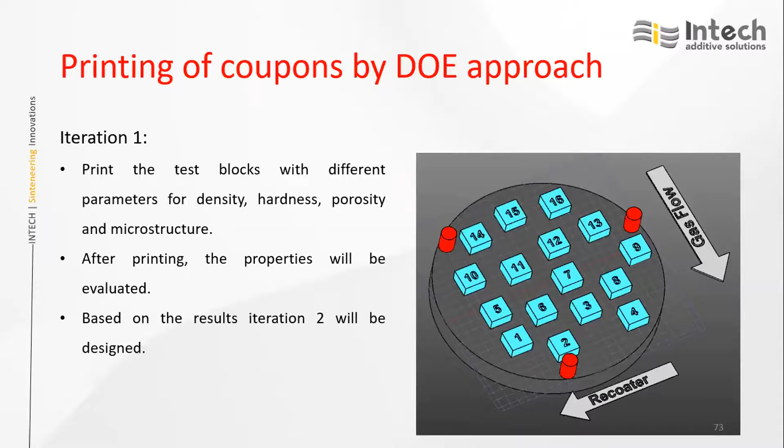With 16 different process parameters that we need to get, we need to evaluate properties like density, hardness, porosity. Based on the results, we need to plan the iteration 2. With few parameters being good, taking that as reference, we split for DOE 2 with a lesser number of samples.

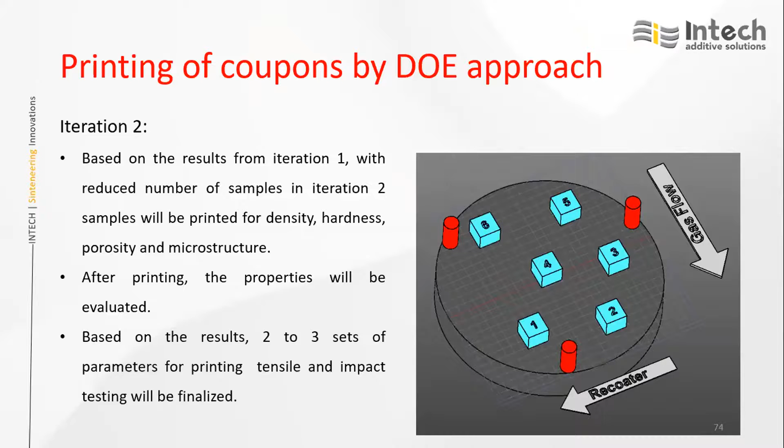In this process, if you optimize it, again we need to check for density, hardness, porosity, and microstructure. If it is satisfactory, then we pick the best parameters from that and print for tensile and impact testing.

In this test there are 3 parameters, and we can see many tensile and impact coupons. If all 3 parameters are good, it's not that only one parameter set will work for the given material. There will be many parameter sets which will work for the material.

In this case, how the selection happens again depends on the productivity. If speed and layer thickness is less, the printing speed will be less. So all this, based on productivity and the roughness requirement, determines the selection of process parameter.

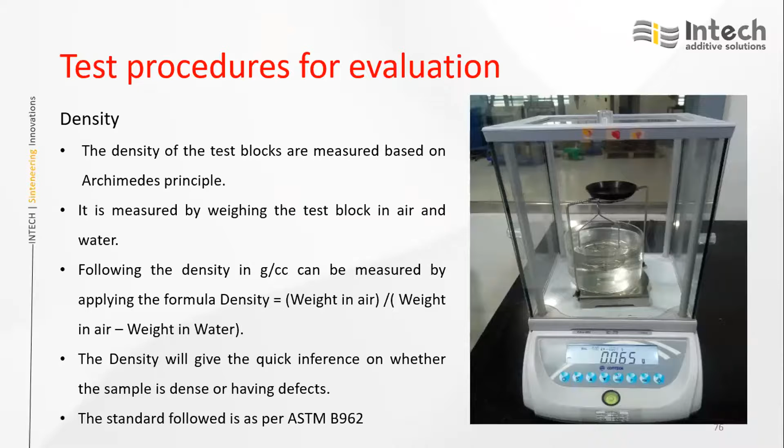Density measurement is as per the Archimedes principle. It is calculated based on weight in air divided by weight in air minus weight in water. The standard which we follow is ASTM B962.

For hardness, if it is a printed coupon and you directly want to check on the coupon, we will do macro hardness. And if you want to check along the grain boundaries at a finer level, then we can do micro hardness.

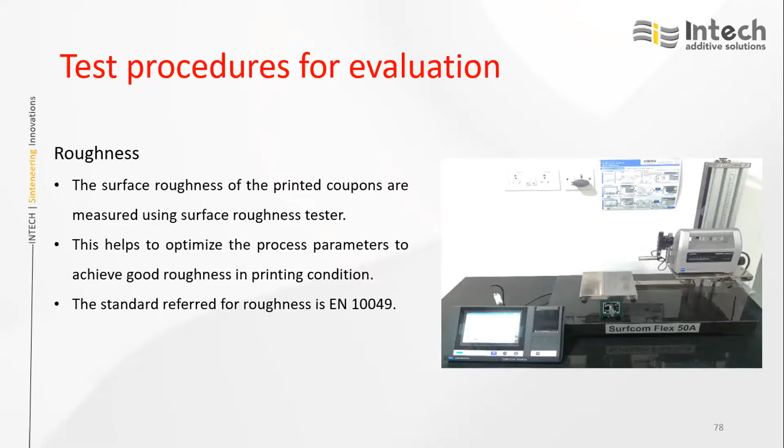Roughness, in the printed condition and after post processing or machining, can be evaluated as per EN 10049.

When it comes to porosity, we have to use the standard material preparation procedure for preparing the sample, like cutting, mounting, polishing. Once that is done, we put the sample onto the optical microscope, capture the images, and with the help of image software, we evaluate the amount of porosity present in the component.

Then comes optical microstructure. This is optical level. If advanced level, EBSD, EDS can also be performed. For us to optimize the process parameter, optical level is a subset enough to get a good amount of confidence in developing the process parameters.

When detailed evaluation of the material, detailed qualification of material needs to be performed at the component level, then we need to evaluate EBSD, EDAX, X-ray diffraction, all those we need to perform.

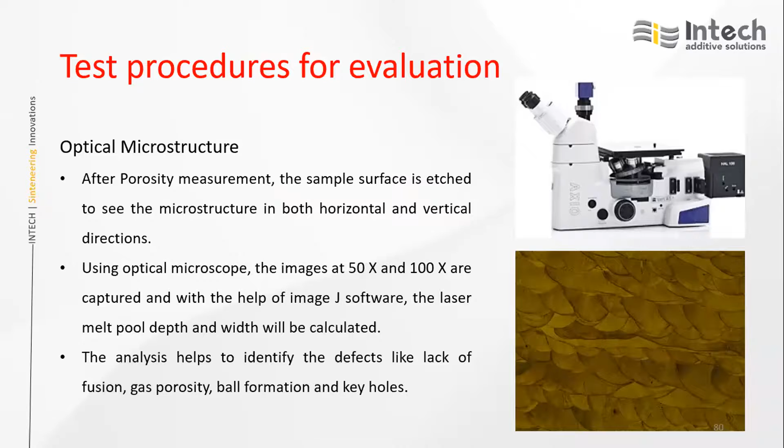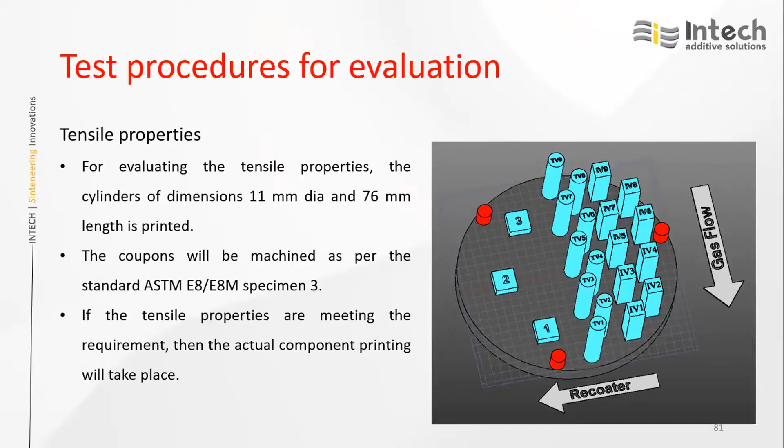For tensile properties, since we have printed tensile bars in the form of either cubes or cylinders, we need to measure this as per ASTM E8 for tensile and E23 for impact, and test it. Here the reference, like tensile and impact, we will go for Wrought-Alike properties. It is very difficult to meet the Wrought-Alike properties.

How close the properties are to manufacturing we are achieving compared to the wrought-alike. We'll check if it is satisfactory, and for the given application if it is above the specified limit, then it is accepted and taken for production.

Fatigue and creep, normally we will not do it for simple parameter optimization. When there is a specific alloy for a specific application, for a specific component printing, where fatigue and creep are also very important factors to be considered, in those areas we will take this also into account.

Microstructure analysis using SEM, phase identification using XRD - this is also purely optional. For the basic level parameter optimization, all these need not be considered.

Once actual component printing and the qualification step is done, we will be printing the actual component. Few customers like HAL, BHEL, they will ask to destroy the actual component and perform the tensile and impact testing, because whatever we do otherwise is at the coupon level.

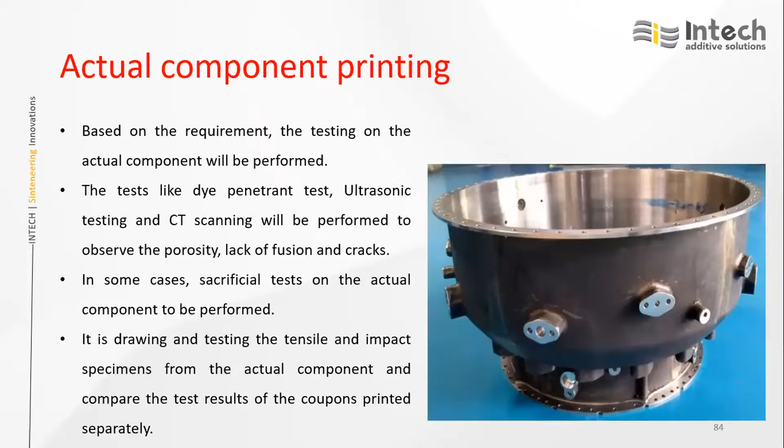Now I will be showing one case study with the material X22 chrome moly vanadium alloy development. This is for steam turbine blades. This is a DST project in collaboration with the Indian Institute of Science and Triveni Turbines. In this particular DST project, our role is to develop the process parameters and qualify the material for additive manufacturing for printing the turbine blades.

The complete characterization of the material is done by the Indian Institute of Science by Professor Dipankar Banerjee. The motivation for this material is...

Normally the turbine blade is made by forging process and then machining. In this process, a lot of material wastage occurs. As there are some advantages because of additive manufacturing, complex shape features can't be produced through machining - like conformal cooling kind of things can be achieved in the additive manufacturing process. So it is always better to have an alternate process like additive manufacturing when we change the designs.

So this particular material is planned to be developed by additive manufacturing process.

In this process, we have a spec - that material specification, the chemical composition of the conventional method that we have taken. We approached many powder suppliers and finally successfully got the powder with that chemical composition, and we have qualified the powder. Then with the help of our AM Optomet software, we have developed the process parameters, and in a quick run we have...

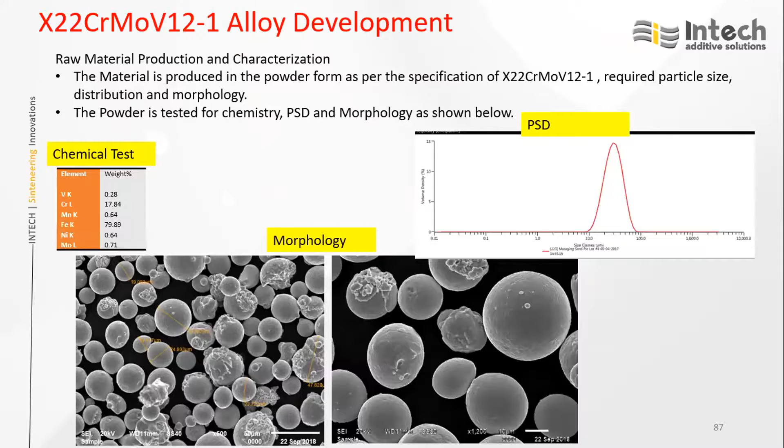This is the powder level. We have measured the PSD, chemical composition, and morphology - all are satisfactory. Then, with AM Optomet approach and without AM Optomet approach, what is the difference using our developed AM Optomet software?

Like as I explained, the DOE approach requires printing many coupons, and we have to go iteration 1, iteration 2, iteration 3, iteration 4, like that. With the help of AM Optomet, in iteration 1 at max, or iteration 2, we can develop the process parameters with so much time and money savings.

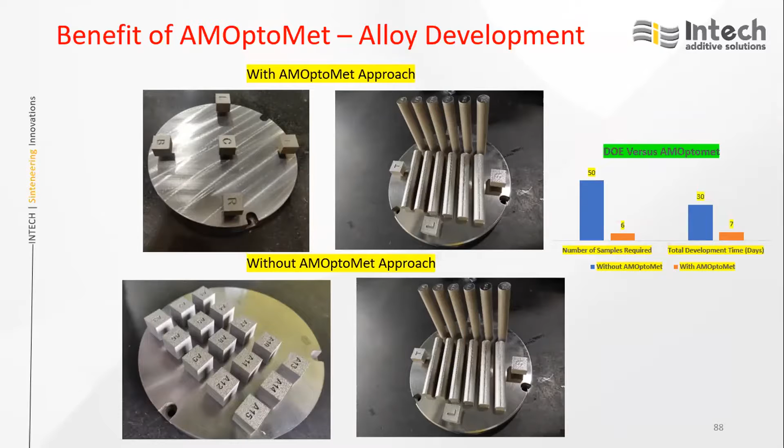In the right side graph, you can see the number of samples required. With Optomet, with less than 10 samples, we can get the good parameter. Whereas without Optomet, we need to print so many test blocks, and the time for developing the process parameter without Optomet is 30 days. If we go with the normal DOE approach versus with Optomet, we were able to develop the process parameters within a week's time.

Initially with Optomet, we have taken process parameters for 30 microns and 40 microns, and both gave us good density with porosity levels less than... we achieved density of 99.95%.

And finally we have chosen 40 microns over 30 microns because of productivity. 30 microns will have more number of layers for a given component, so the printing time is more. We are getting similar properties for both layer thicknesses.

So finally we have taken 40 microns for actual printing, and heat treatments have been optimized. The requirement is tempered martensite. To achieve that, many heat treatment cycles have been applied, and finally the heat treatment cycle is also optimized. This work is carried out by the Indian Institute of Science.

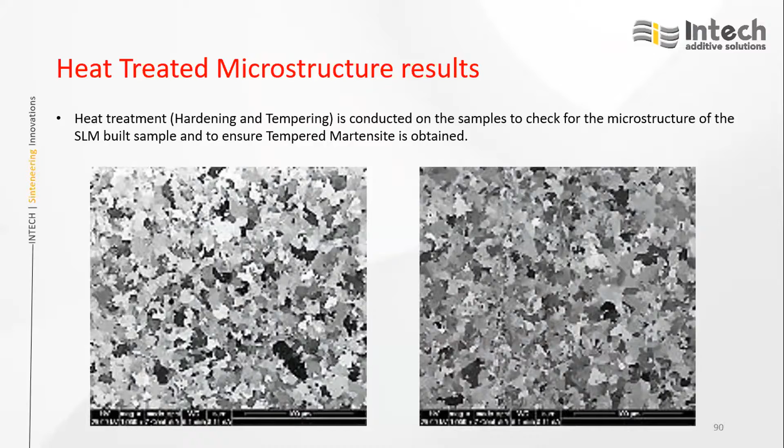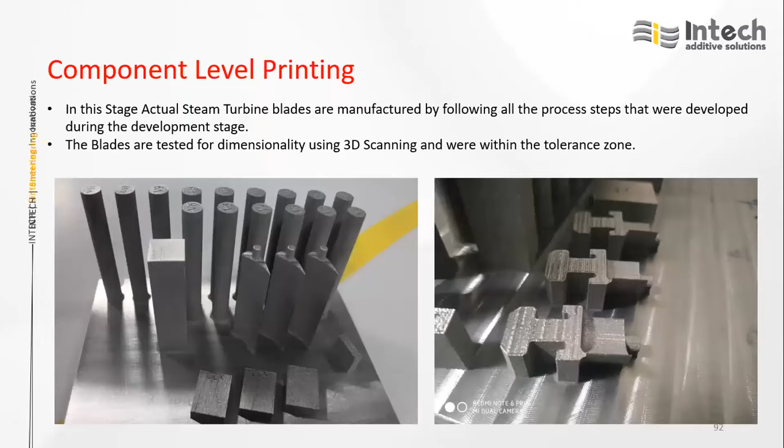Once that qualification is done, we printed the actual blades. In the left image you can see 3 blades which are built vertically. On the right are a few more components which we have printed. These components were checked using 3D scanning inspection for any defects or distortions compared to the CAD model.

With this, I'm closing my presentation, and I'm open for any further discussions.